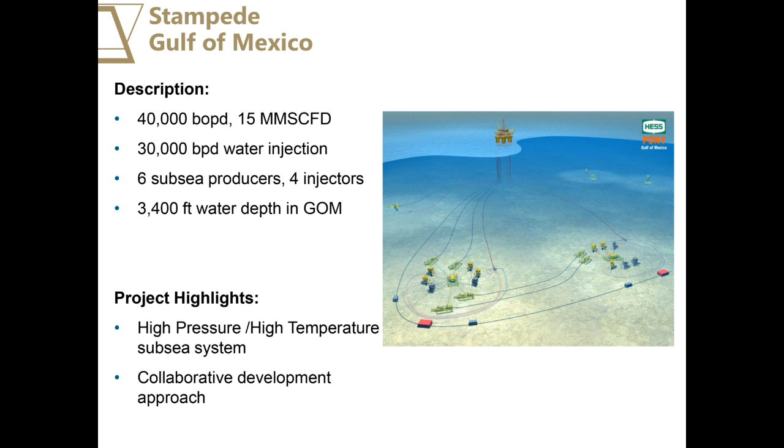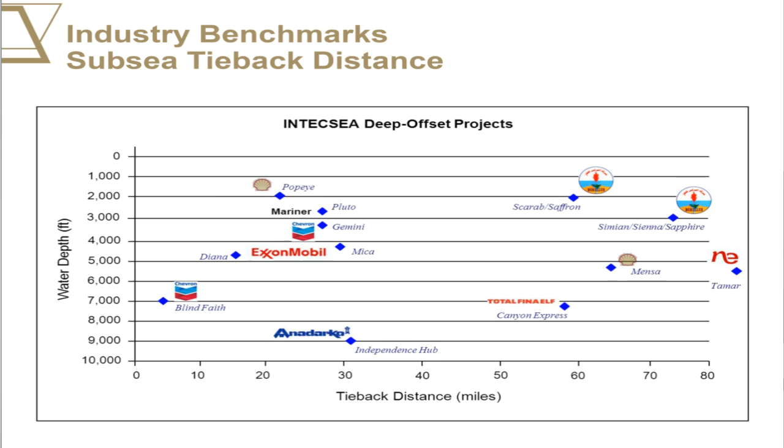Another one I'll share with you is tieback distance. Tieback distance is a terminology describing, where you have your reservoir and where you put your wellheads and trees, the distance from that location to where you're actually going to process the production. When production comes out of the reservoir, it's unprocessed - it may be three-phase, gas, oil, water, a mixture of various things. This gives you a flavor of how far from the subsea location you can actually reach back in order to achieve that.

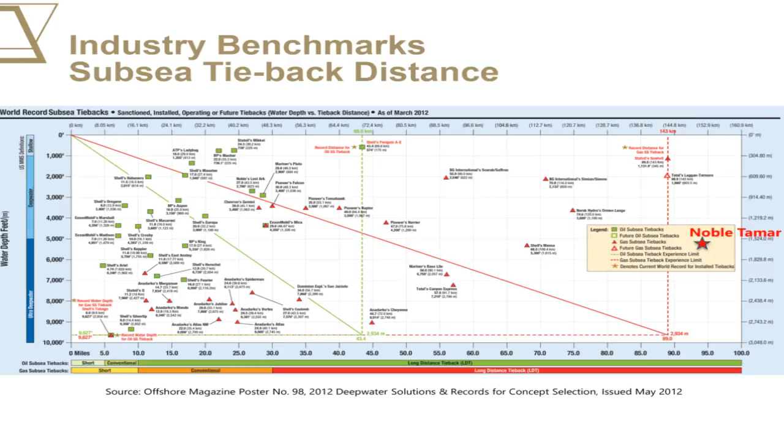You can see here on the bottom, this is up to 80 miles, and then this is the water depth from the top down, from 0 to 10,000 feet. You'll notice in the oil and gas business, we flip back and forth from imperial to metric depending on where you are in the world. Pipeline diameters are always in inches for whatever reason, that's the norm. In Europe it's a little bit more in millimeters, but these are the metrics and norms actually used around the world.

Just to give you a flavor, for gas subsea systems there have been pipe developments up to 90 miles away from where those trees are to where the production is actually processed. For oil, it's more in the 40-mile range. So that's the longest distance from that location.

Here's another chart plotting the same information. Again, the red line showing the gas reach is about 90 miles, into about 3,000 meters of water. The oil reach is into about 40 miles from the location of the wellheads and trees back to where you actually process it. That's a pretty key metric, because that's some of the things that start to bind what my solution looks like, how I'm going to develop this, and so on.

So those are some benchmarking things I wanted to share with you. We'll come back to that again, but if you can take away from here, the relationship between water depth and pipeline diameter, and also the tieback distance, is pretty key to understanding how developments actually come together.

So just to give you a world tour, I'm going to start in the Gulf of Mexico and head east, and we'll quickly get to, I think, as far as Australia, and then we'll stop. We should be able to get to Australia in about 5 minutes, if that's okay. We're moving pretty quickly, but it should get there.

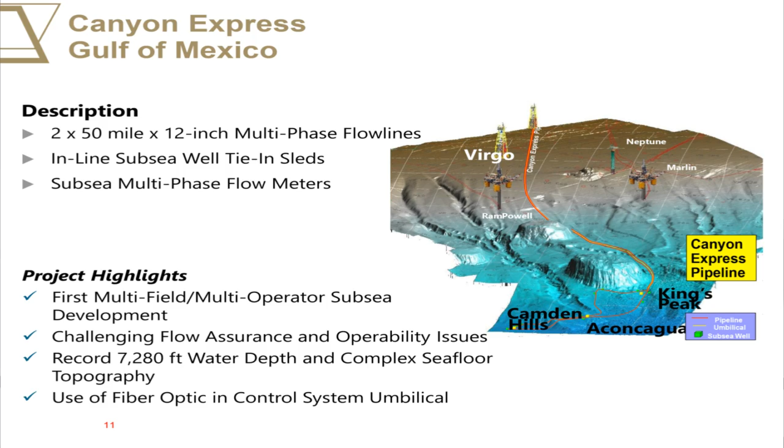The other thing that was very interesting during the installation is the installation vessel had to install the pipeline within 60 feet of the wellhead. That may sound pretty straightforward, but the pipeline is being held from the surface on the vessel, which is probably a mile away from where the pipe is actually touching down on the seabed. So when you think of the logistics, the challenge, and the survey of actually achieving that, it's actually very difficult to do, but can be done. So that's Canyon Express.

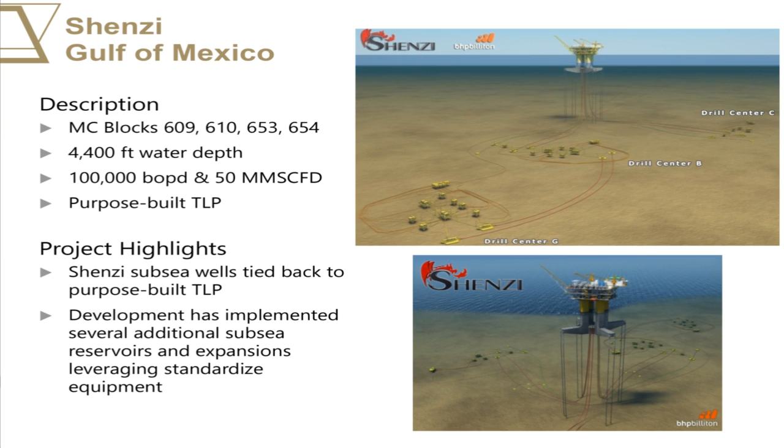Shenzi is another development in the Gulf of Mexico. The interesting thing is these hull shapes can vary, there are several different types out there. This one is a TLP development, which is really trying to manage the motion, and it's really to do with what hull shape can balance the payload you're looking to hold up, and also how your reservoir is actually spread out. This is a very vast and spread development, so there are several different reservoir locations.

This development was interesting in that it's now on its 10th expansion, and it ties back to the same hull. The first one built about 3 or 4 locations where they drilled the reservoir and tied it back to the facility, and then over the lifetime they found more locations, drilled it, and tied it back to the same location. So this is an ever-evolving opportunity that was built probably about 10 years ago now, maybe a little bit further than that. This is an oil and gas development in the Gulf of Mexico.

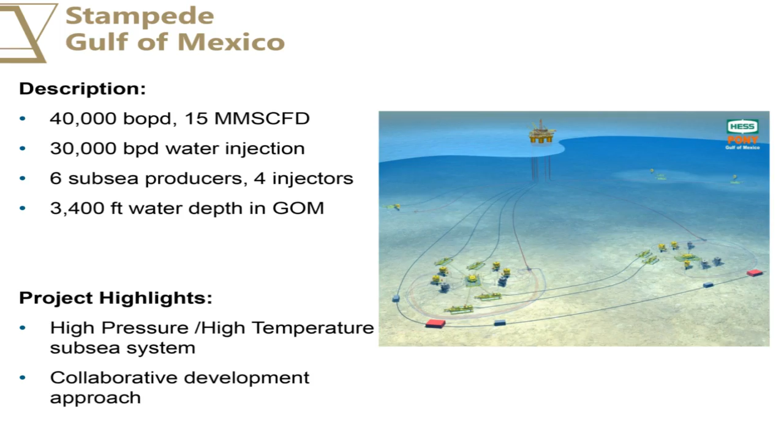Stampede is one that's being built as we speak. Again, the interesting thing about this development is it was actually high temperature, high pressure. You'll hear us talk a lot about high temperature and high pressure, but what does that mean? We're talking about 250 degrees Fahrenheit as high temperature, and pressure in the order of 15,000 PSI, or 15 KSI. So you can get a flavor of the kind of pressures and temperatures you're dealing with. Very hot, very high pressure, and think of the force that generates - it's pretty impressive. Pipelines move, they have to, and your vessels have to be able to contain that kind of pressure. So there are quite a few challenges in making that happen.

Then we'll take a quick trip over to another arena. This is now moving into Arctic. I'll tell you a story about how I ended up being an Arctic engineer if you've got some time.

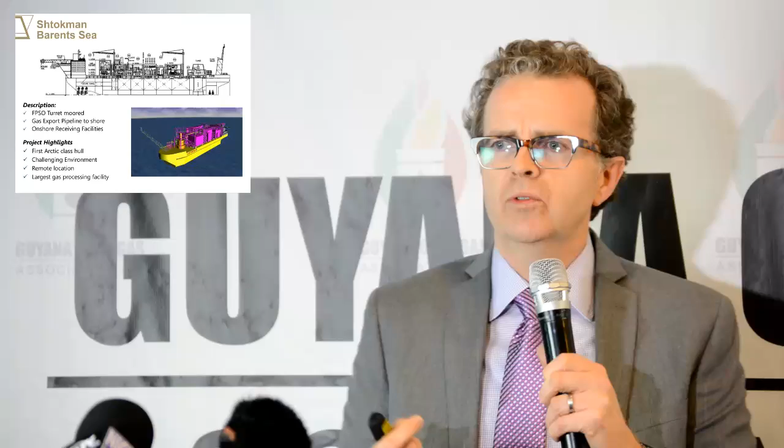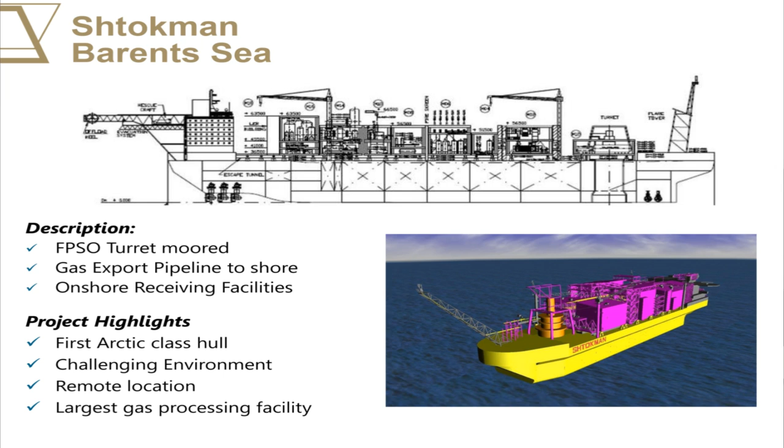In the Barents Sea, there was a development that Gazprom was looking at called Shtokman. It wasn't actually built - there were a number of partners involved, but this was a large gas play, large in scale in regard to the amount of gas it had to process. This was in an Arctic arena, so basically everything had to be qualified as cold temperature steel, which is a lot more challenging than you would think. The steel had to still show ductility and fracture toughness at very low, sub-zero temperatures. So these were some of the challenges of coming up with a naval architecture solution for a hull shape that could withstand that kind of temperature and environment. This is more of a hull challenge and a remoteness of location challenge than actually a subsea development challenge. But an interesting project over in the Barents Sea.

Moving into the Mediterranean, you'll find it tends to be more gas plays - that's the type of hydrocarbon they find here. There are 2 developments here. One was called Scarab Saffron, which ties back into Egypt, and I'll talk about another one, Tamar. Here's where a lot of groundbreaking technology really pushed the envelope on stretching the distance from the reservoir location back to where it's actually processed. This was the first one, about 15 years ago, that really pushed the envelope and got that tieback distance over 50 miles - it was actually up in the order of 60 miles. It also took on some challenges - some of the challenges of long tieback distances are around the flow regime.

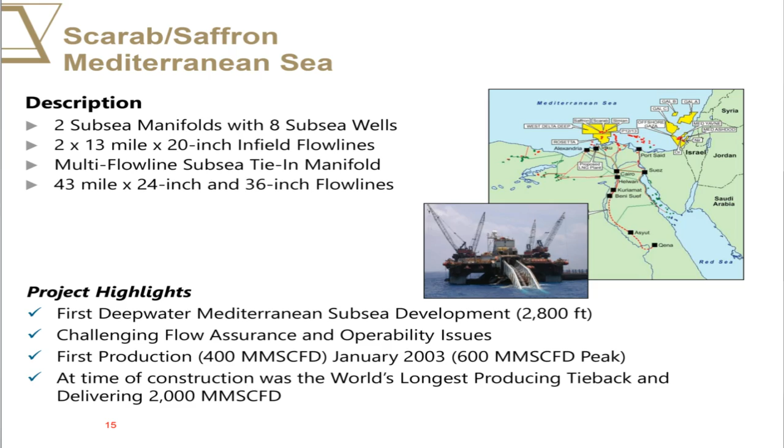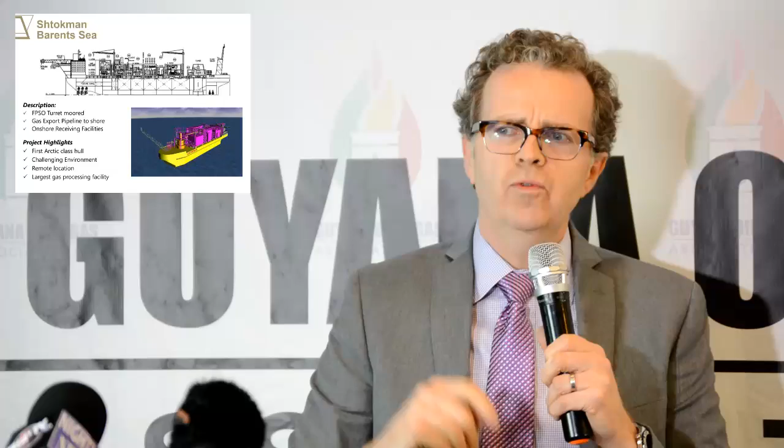So gas, we all think of it as a nice gaseous product, but often there's condensate with it, there's liquids with it, and how do you manage that when it's flowing through a pipeline system? It's also the other thing, how do you control everything remotely? You're trying to control something that is that far away, and you have to have the control systems and the ability to actually function wellheads, function trees, and inject chemicals and so forth, and manage the whole development from there. This is one of the ones that really started pushing the envelope on that distance.

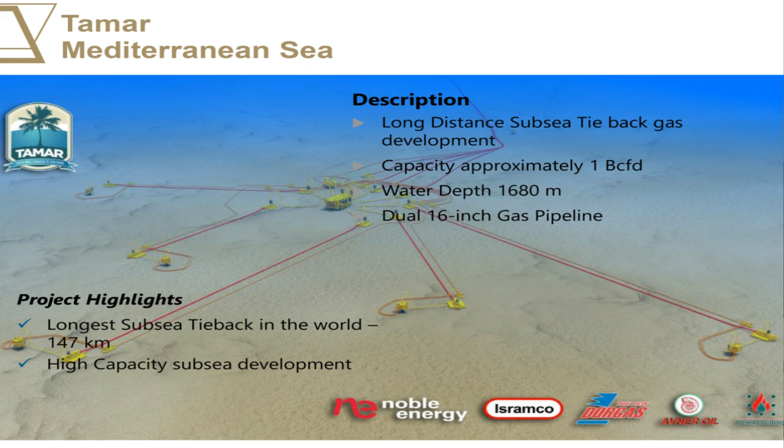A subsequent one more recently is just off the coast of Israel. This is actually the record at the minute, at about 147 kilometers, about 90 miles, a little bit over 90 miles. And even in this solution, this one actually increased the capability of controls technology and moved towards using fiber optics and elements like that to actually bring on the solution. So you can see, in this arena, the challenge is more long distance, and how do you make the connection from where the reservoir is back to closer to shore.

Some things that are happening in West Africa, there's a lot of development in Ghana. You can see in the Ghana region they're beginning to move into deeper water, 2,500 meters of water, taking on very high temperatures, high pressures. So looking at what does the subsea architecture look like to pull that all together. But you can see the solution is a combination. They have a floating hull system with offloading system for the oil, and then coming up with a subsea production layout that will access the different reservoir locations of where you want to place your wells, and also tie it all together so you can connect it all back into the hull.

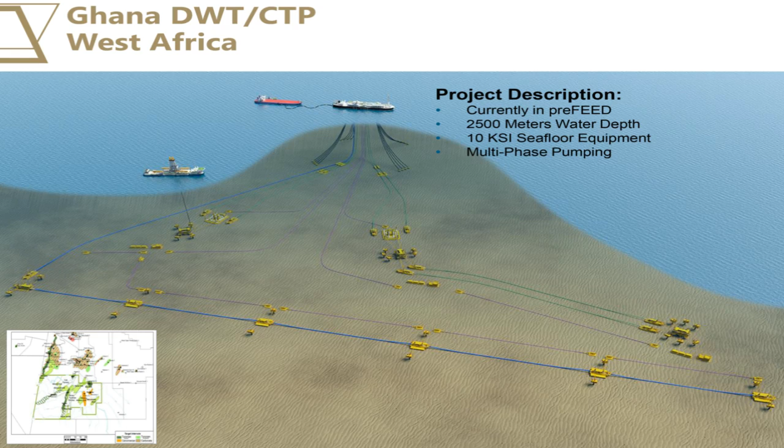So the challenge here in this arena is it's kind of a developing hydrocarbon business. There is hydrocarbons in Ghana, but obviously this is then pushing it out into the deeper water, the high temperature and the high pressure, and then pulling it all together for the spread reservoir development.

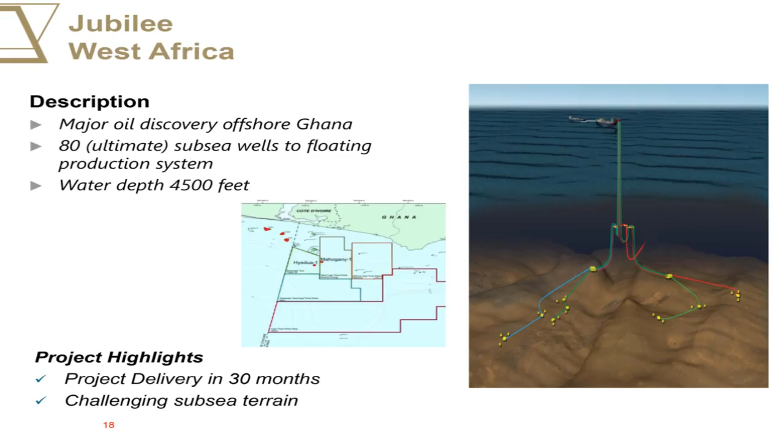Jubilee, again, is a development in Ghana. This one was challenging. The goal was to make it fast track and bring it on stream. So it used a lot of known technologies, and they moved forward on solutions that maybe were a little bit more expensive, but would definitely fit within the range of parameters of how it was going to be operated. The drive about this development was to actually get it from the asset find to production in a very short order. This one actually came on within 30 months of the find. So extremely short development period, but that leveraged less time to optimize the solution, and really focused on getting a solution that's robust and can actually work.

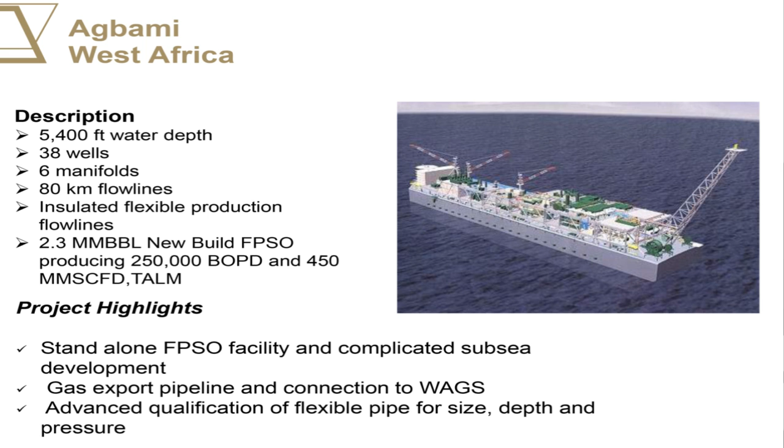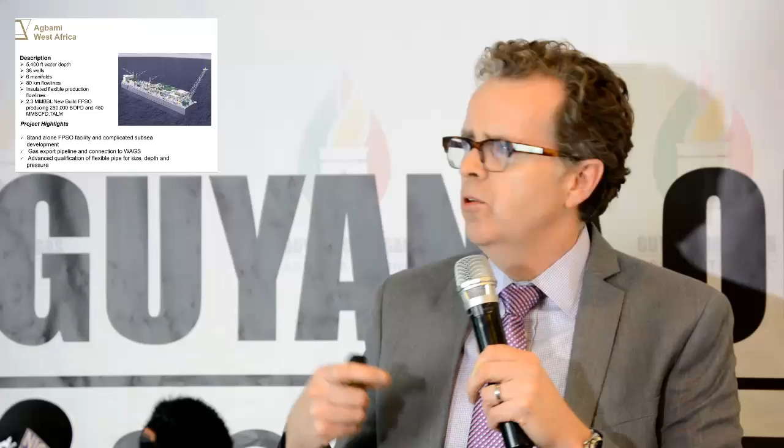This is what they call a ship-shape hull, or an FPSO, and you can see all the topsides on it. Below the surface is all the subsea equipment that ties back into this, and then this is where the process happens and then offloads and ships the oil back to market. Challenges in this arena were really some of the architecture, so it came out, and I'll show you some examples of that. Just how do you tie it all together, a very spread out reservoir, very challenging arena.

And again, keep moving on, we're now in the South China Sea, so we've made halfway around the world so far, only 5 minutes in. That's pretty fast. I think we're a little bit faster than Santa Claus, but we're making good progress.

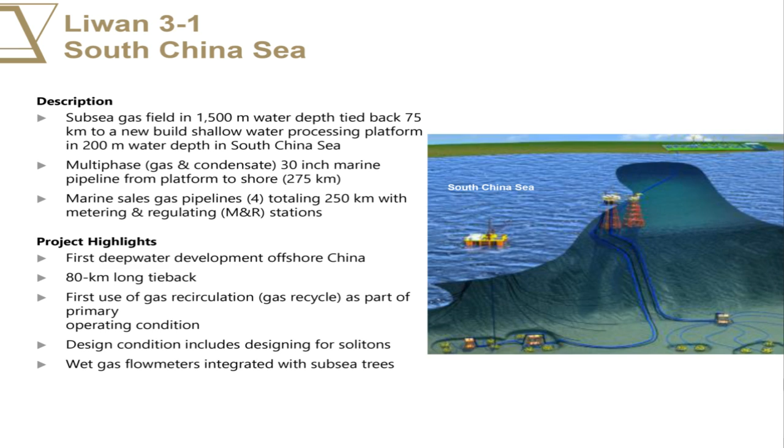And here, this was the first subsea development in the South China Sea. What this one really strove to do was it still had to process the oil and gas, but you can see it leveraged the capability of putting the subsea equipment down the slope and tying back up this large slope to a shallow water where you could actually put a rigid platform in. You could put a platform in the water depth that would connect rigid to the seabed, and typically that's a little bit more economical than a floating system, but you can see they're leveraging subsea tieback technology, and then using the development processing point in shallower water. So you can see the South China Sea is moving into the subsea arena, and this was the first one, built probably about 5 years ago.

And I think the final one I'm going to show you is Murphy, the Siakap.

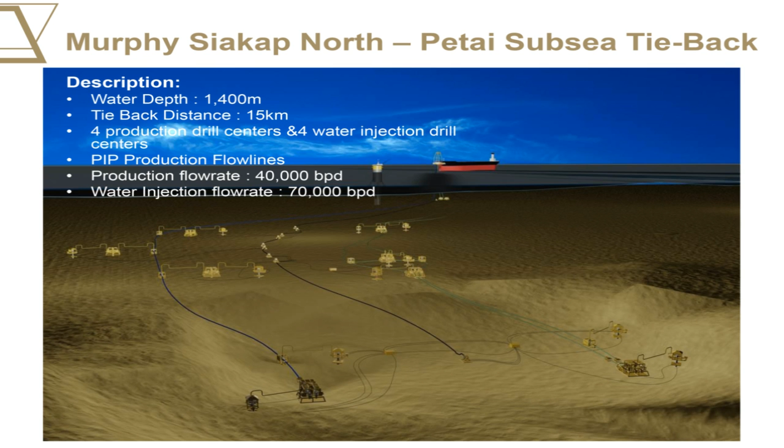This again is in the Far East, showing the subsea layout and how it ties together. I've got some examples that'll explain the different types of architectures and where they're named, but the idea is just to give you a flavor. You can see they all look a little different, and I'll talk you through some of the different solutions put together to make this happen.

Finally, in Western Australia, you can see it's moving into the deep water. This is a fairly large hull - this would have been the first semi-submersible built in this arena. The interesting thing about this part of the world is, we have hurricanes in the Gulf of Mexico and the Caribbean area, but here they have cyclones, which are even the next scale up in regard to environments and sea states.

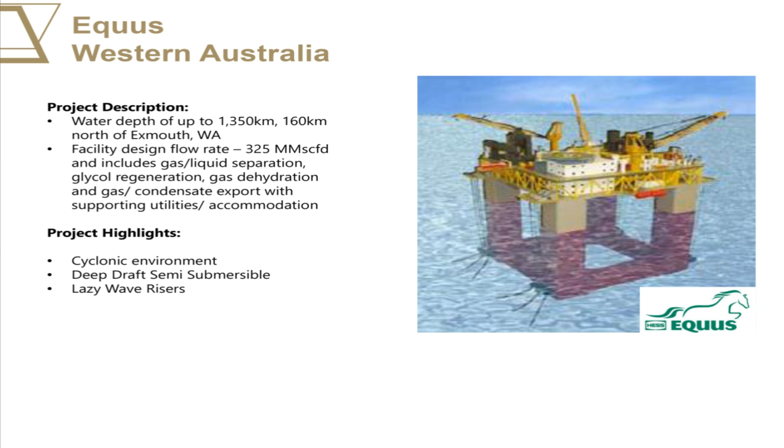Each part of the world has different challenges, different environments, and different reservoirs. So every single solution you put together has to combine the industry capability, but it has to get customized for that development. So it's the world tour - we didn't make it all the way around the world, but we got pretty far, and hopefully that gives you a flavor of what some of these developments actually look like.

So the big question on your mind as you're processing this: you can see the developments usually have some kind of floating hull, and usually some kind of subsea architecture. The question is, how do you go from a blank canvas to saying, this is my answer? What's the process to get there? How do you do it? It's a number of different features.

That's the other three-hour part of the lecture that I'm not going to show tonight. But as you can imagine, the first thing you've got to know is what's in the reservoir. You have to shoot your seismic, drill some exploratory wells, and then figure out - have I got oil, have I got gas, have I got a combination, do I have water?

And then, where are the different locations this reservoir sits? Is it all in one location, or 10 kilometers over here, 20 over here, 30 over here? Where is it relative to the beach? Relative to the infrastructure? Because at the end of the day, this is just getting the production out of the ground - you still have to get it to market. You have to find out where your market is, what kind of market you're selling to. Am I selling gas? Am I selling oil? How much production do I have to deal with? So you have a lot to think about.

So we'll walk through the various flavors of these and explain what they are. The simplest one in the subsea space is a single well tieback. You have one location, one well that you install, and then you connect it back to some kind of host facility or platform. You can see the infrastructure is pretty simple: you have a subsea tree, it connects to a structure, and then ties back through a flow line to the platform. The umbilical manages the controls.

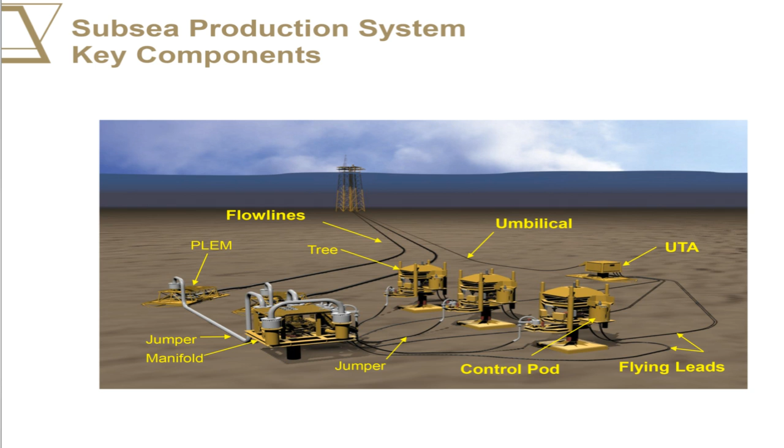Then you start getting a little more complicated with a well template manifold. Here I've got 3 wells to install, but I want to be efficient. So I'll drill through a template, which is a structural orientation guide, and stick all my trees on top that manage and control the reservoir and the well. You've got 3 wellheads and trees on top, connected over to the flow lines, and then tied back. That's a well template manifold. What drives that is how I'm going to drill my wells, construct my field, and tie it together. Everything's pretty close together, neat, and straightforward.

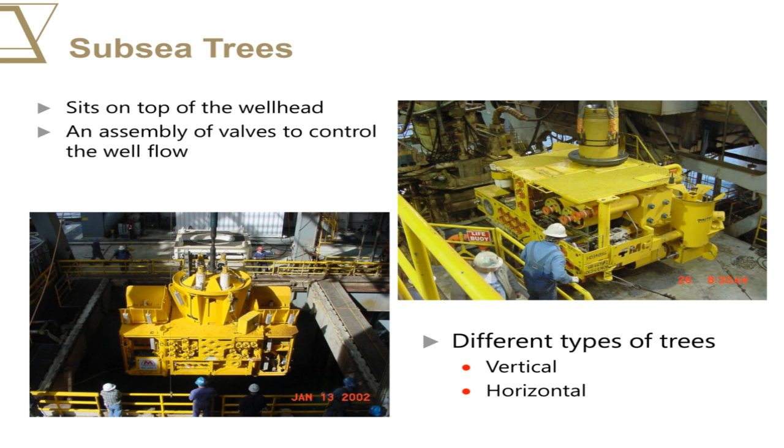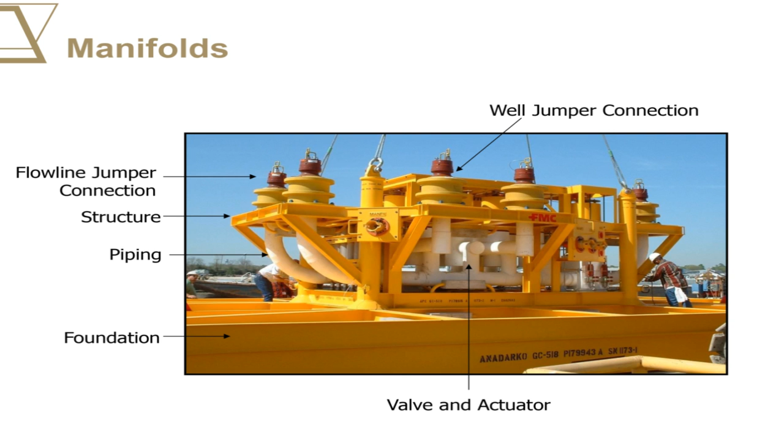But then you start looking at a manifold cluster. Here I'm using a slightly different drilling technique - I'm not drilling through a template, I'm drilling independently, but close enough together that I can set them all up and connect them into a structure called a manifold, then connect it back into the flow lines that take it back to the processing facility.

You can go on and it starts getting more complicated. Here I'm putting the wells further away from the gathering structure called a manifold. This distance can be in the order of 10 meters or 10 kilometers or so. That might be where you've got a very spread out reservoir and need to access all these locations.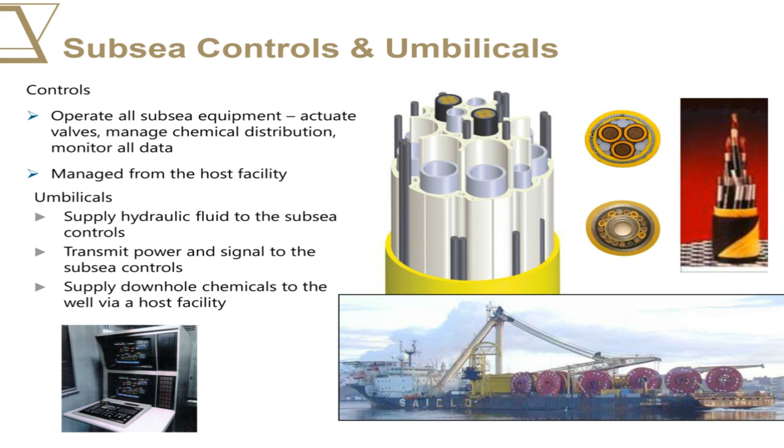So I've given you an idea of some projects and a flavor of some different architectures. I know I've worked through a lot of these things very quickly, and I know you won't remember all of them. But hopefully it gives you a bit of a flavor of the terminology and jargon we use. It starts getting quite complicated, particularly around these control systems and all the different pieces of equipment you need. And you've got to remember we're in 6,000 feet of water, 2,000 meters, right?

No human being is installing this - it's installed by remotely controlled vehicles. You're working on trying to visualize with the video, using torque tools and structural and mechanical arms to actually install this. So you've got to think about robots installing this, and think through the process of how that works, because you don't get the same reaction from touch that a person would get, whereas you don't get that same sensation when using an automated system. So you have to think about these kinds of things when designing equipment.

So that gives you a flavor. So now you know everything. Now for the pop quiz before I go into the final thing. No takers? Okay, hopefully that gives you an idea of the technology, a bit of a flavor of some of the terminology, and just how these things fit together.

Just another rule of thumb. We talk about 6,000 feet of water - what does that really mean? The metric on land that I think of is the Empire State Building, which is 1,250 feet. So we're about 5 times the height of the Empire State Building, from the top of the water to the seabed. That's the scale of the arena we're working in. The other thing to bear in mind is the pressure in about 6,000 feet of water is at about 3,000 psi - that's the hydrostatic pressure at that water depth.

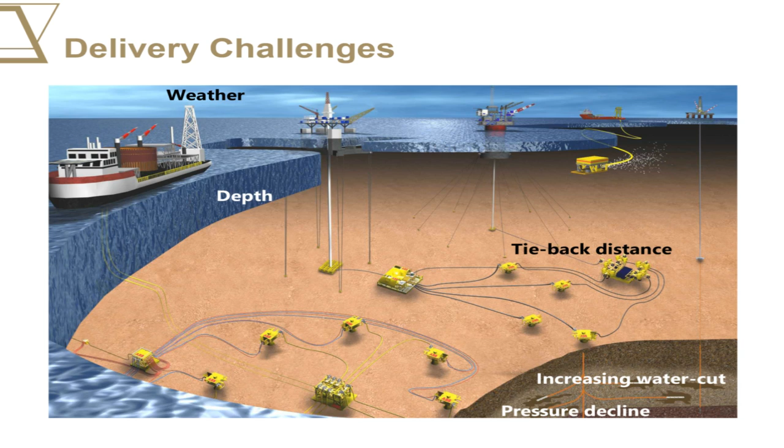So you get an idea of the scale of the forces we're dealing with, and the scale of the engineering and the size of equipment needed to withstand that pressure. So just to give you a flavor of delivery challenges, I like this picture - it shows a schematic, and it varies. Things you need to worry about: weather - every region has a different environmental regime. Water depth - obviously the deeper the water, the larger the vessels you need to install it typically. Tieback distance, we talked about that - that's the distance from where the wellheads are back to where the production facility is. And then what you have in your reservoir is very important - is it oil, is it gas?

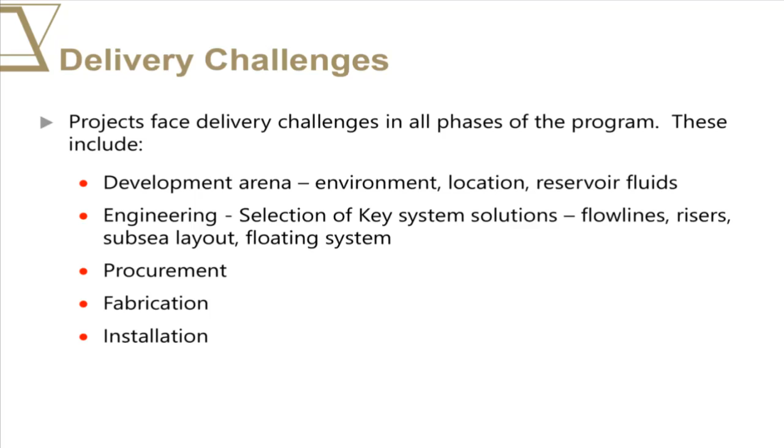So this is the most unexciting picture I have - it's all text, sorry about that. I couldn't get it, but I thought I'd put it in just to see if you were paying attention. Basically if you think about delivery challenges, you have to think about the arena - environment, location, remoteness, reservoir, what do you have. Then you have to pick what solutions you need for your flow line, for your risers - I didn't talk about that. A riser is effectively the vertical section of pipe that connects the flow line on the seabed to the floating facility - that's another piece of terminology I didn't go through.

We talked about architecture, and then what floating system - is it a ship-shaped hull, is it a TLP, a tension leg platform, and so forth. Then you've got to procure it, fabricate it, and install it. These are all similar challenges you have in most projects, even projects you build on land - what's the solution look like, what am I going to use, how am I going to buy it, how am I going to build it, how am I going to operate it?

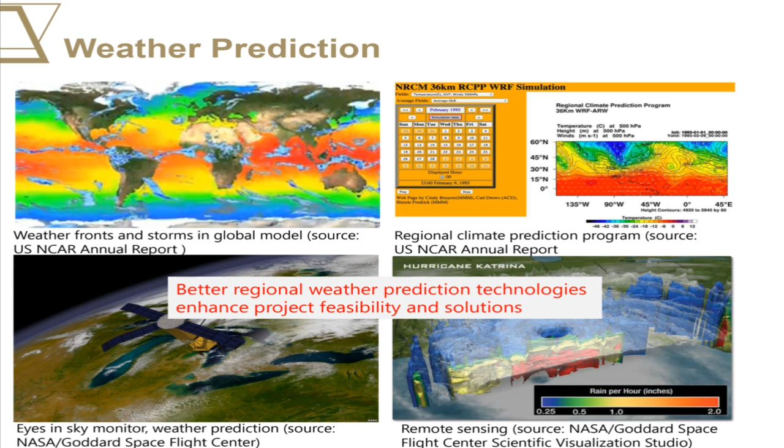Weather is very interesting, but part of the thing is figuring out what our weather is. The weather ability is getting very sophisticated - the currents we can measure, the rainfall we can predict, the waves we can do the hindcasting on. Because we design for extremes, we design for the extreme event, not the day-to-day stuff - we design to survive the extreme event. So it's very important to get this kind of data to drive your facility.

A 20-story building, something like that, gives you a sense of scale.

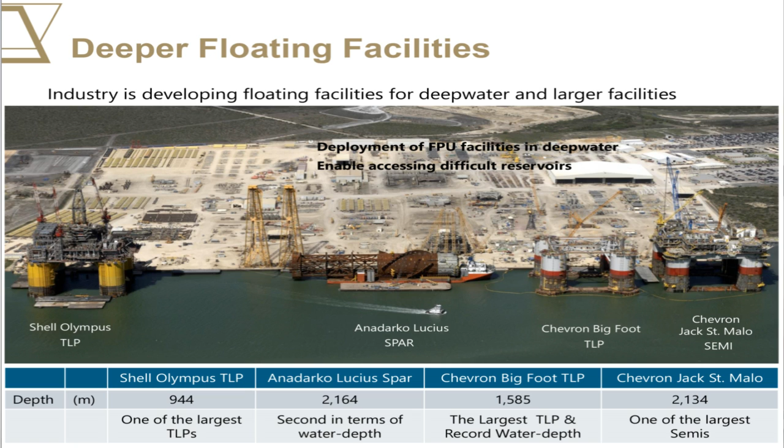So then this is a Big Foot. Here was another TLP hull. This one here in the middle is a spar, so it's a long cylinder. The vessel motion moves more like an inverted pendulum, so it kind of bolts around like this. It has a different set of motions and a different water depth that it can actually be deployed in.

And then the one in the far corner is a semi-submersible. This is not dissimilar to what drill rigs look like a lot of the time, but this typically has a much larger payload for a heavier topsides, so it usually can carry a heavier topsides. Again, it tends to move a little bit more, so it's got more vessel motion challenges. But again, all are feasible solutions and all are being used in the offshore market.

What I didn't show you here is obviously the ship-shape hull, which is more what the FPSO, floating production storage and offloading system, looks like. Maybe there are more of them deployed around the world than any of these other types together. So that's all part of your decision: what type of production do I have? How do I need to offload the production? What does it look like?

And then flow assurance. We talked about flow assurance, finishing up here in a couple of minutes. Flow assurance really is a study of the internal hydraulics of the reservoir production fluids.

It's got to do with a lot of issues, like do I have oil, do I have gas? This usually has a mix of all sorts of things in it. Some of the things you have to figure out, and you may have a challenge, you may not, are things like slugging. Basically there's a fluid regime where you have a block of liquid and then a block of gas behind it, so it flows through like a big slug of liquid, and it can have some energy behind it. That's not a good regime of flow; it really kind of limits the maximum throughput of the system.

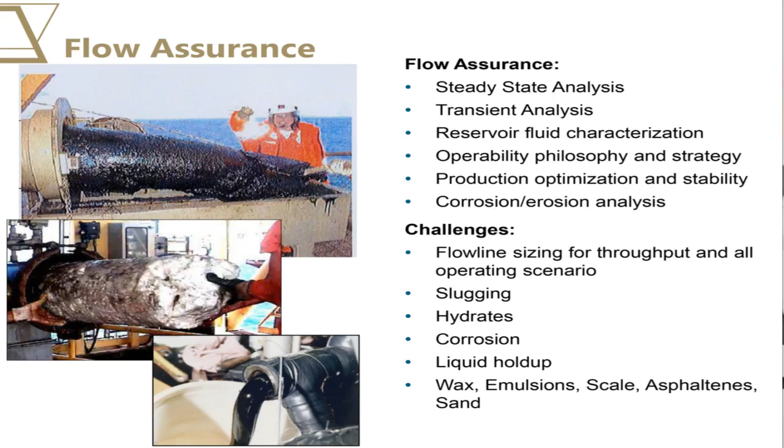Corrosion, all various forms of things, waxes, emulsions, all sorts of things. So you can see there's a lot of study that goes on about: do I need to keep this fluid hot? Do I need to manage it? Do I need to put some internal cleaning tool through the system to keep the annulus open for flow? So it's very complicated, and lots of hard work done here.

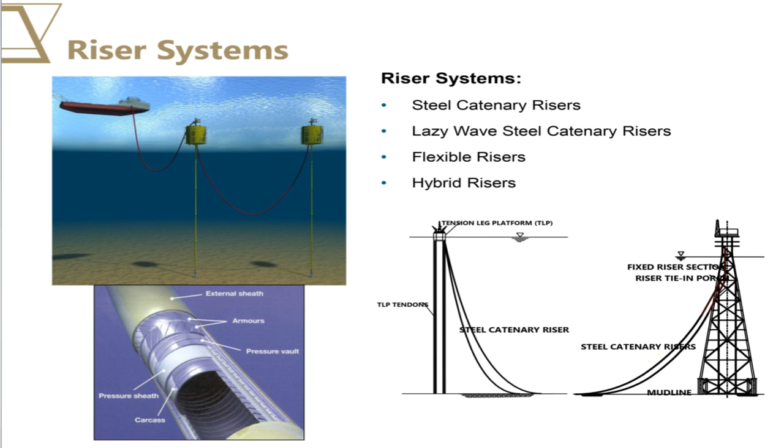Procurement: buying equipment, figuring out what you need to buy, managing all that, getting the delivery. Obviously another challenge, but obviously very doable in the market, in the industry.

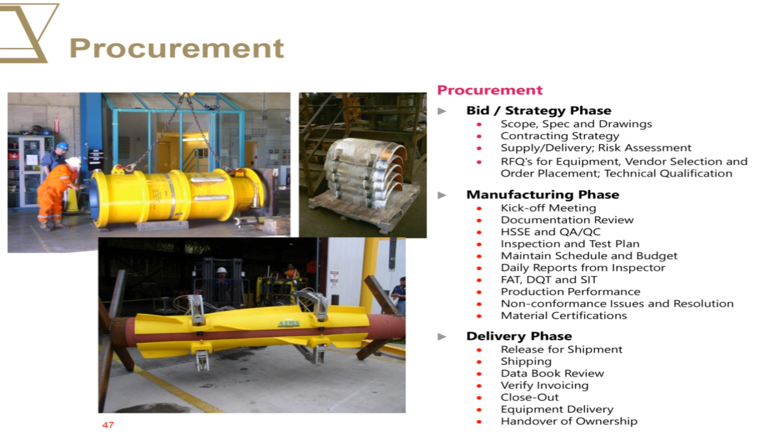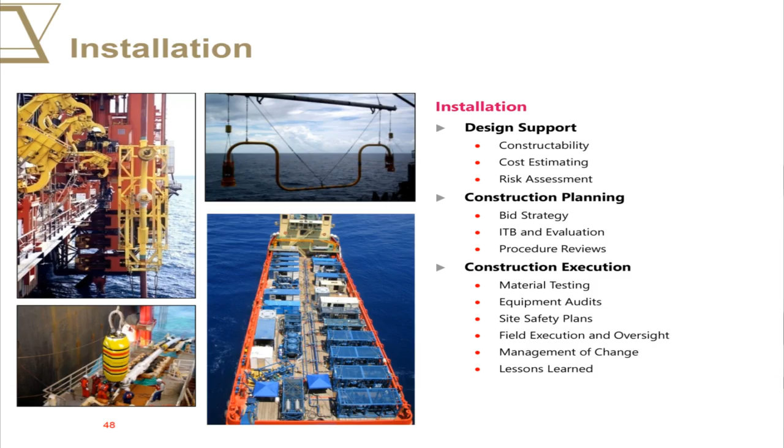And then installation, the scale of the vessels you need to hire. This is just some of the different things you need to have. So to install these jumpers, you need to have some kind of lift crane and spreader bar. To install pipelines, you may need a fairly large vessel to install some of that. And this here is a compressor spread that's increasing pressure to actually sweep the water, because typically what you call your hydro test of the pipeline systems once you've built them is just to pressure test it, but then you have to get the water out of the system, and this is just some of the equipment used to take that out.

For you guys, I think you're in a very exciting arena. Delighted to be here to talk to you, and I think the opportunity is there for the taking. My encouraging words would be collaboration. The projects that have been the most successful are when all the key stakeholders have collaborated together to get a great outcome. I think you guys are having all the right kind of conversations to make that happen, and I encourage you to do so. So thank you for your time, and I appreciate it. I'm happy to take any questions.

Tell me something about the operation of the robots. Do the robots have a mind of their own, or do they operate from someone else's?

When I put the presentation together, I suddenly realized I didn't show a picture of an ROV. So, remotely operated vehicles - the terminology is ROV - it's basically a unit that has a large buoyancy piece on top, because you need something to keep it neutrally buoyant. Then it has all its drives, a series of propellers at the back, and at the front it has mechanical arms. The mechanical arms are operated remotely from the vessel that sits over the top of it, and they can pick tools out of their tool bag.